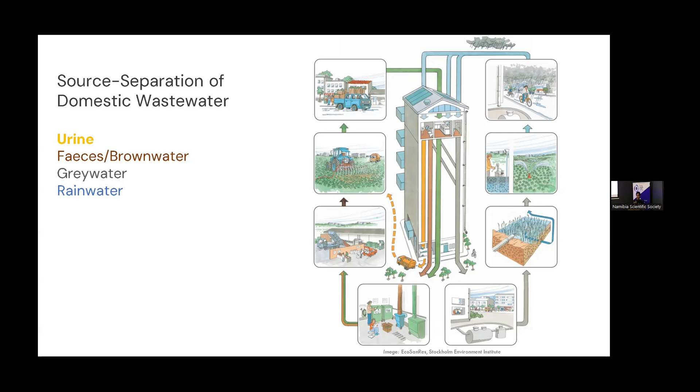personally, I got really interested in urine chemistry because urine is a very interesting matrix in its own, because in our household, only 1% of the total volume of wastewater that comes out is urine. But that 1% contains 80% of the nitrogen and 50% of the phosphorus and potassium. So these are the same nutrients that our wastewater treatment plants use energy and chemicals to remove, not recycle.

So even though urine is such a small fraction, it's not as easy to recycle. You can collect urine and use it as a liquid fertilizer, but you can't scale that approach at a city scale, right? Because urine is 95% water. So even though it's such a small fraction, it's mostly water. And the reality today is majority of us live in cities, in urban areas. So how do we get urine, which is mostly water, from the city center to rural cropland where the majority of the food is grown today?

And depending on where we live in the world today, these distances between urban and rural cropland can be a few kilometers, for example, in Uppsala, where I live, to a few hundred kilometers in New York and Boston. And that's the reason why we don't recycle or transport liquid urine from the city to rural cropland to be used as a fertilizer.

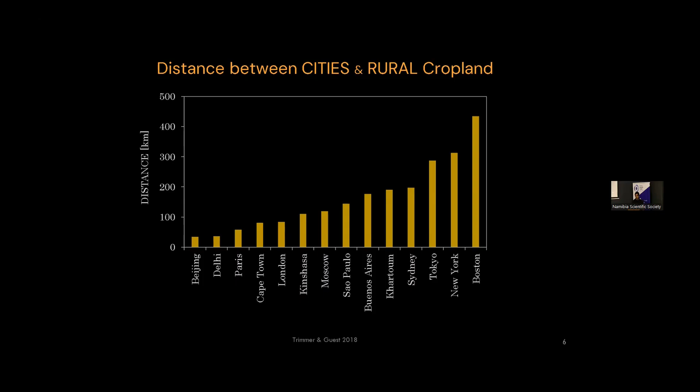So at SLU, at our university, we started thinking, what can we do with urine at the source, where it is produced? What can we do with urine at the house? Is there a way we can somehow dehydrate the urine so we get rid of the water, so that instead of collecting and recycling 500 kilograms of liquid urine per person per year, we recycle only 20 kilograms of dried fertilizer? So on paper, it seems simple, right? Let's separate the water, let's collect the nutrients, let's use it as a fertilizer.

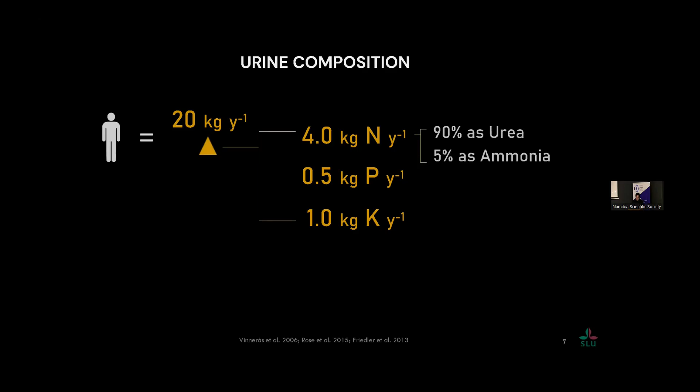So we started investigating that and realized that when we excrete urine, the pH of urine is around neutral, between 6 and 7 for an average person. But once urine goes through our toilets and our sewer pipes, a few reactions happen that convert urea, which is the main nitrogen compound in urine, into ammonia. This reaction produces ammonia, which is a base, so it also has a side effect of changing the pH of urine from 6 to 7 to around 9.

And that's important because at that pH, the ammonia that is produced by the reaction is volatile. It's a gas. So if you've been to a bathroom that hasn't been cleaned often, the smell that you get from urine, the majority is essentially ammonia. And that's because it's a gas.

So urease, this enzyme, is present everywhere in the environment. It's ubiquitous. It's in our skin bacteria, because the bacteria produce urease. It's in our saliva, in our feces. It's in our soils. So when a farmer is applying urea as a chemical fertilizer, this enzyme is actually very beneficial because it converts urea into ammonia, which is a form of nitrogen that plants can take up for nutrition.

But in a source-separated sanitation system where we want to recycle urine, this enzyme is a bit of a nuisance because it takes urea, which is a non-volatile compound and the most widely used fertilizer in the world, and converts it into a volatile form, ammonia. So if you try to dehydrate urine that has already been hydrolyzed, where the majority of the nitrogen is now ammonia, you lose the ammonia as a gas.

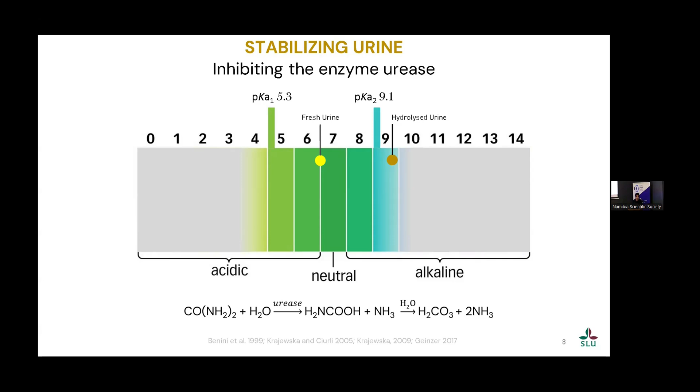So we then started looking at what chemicals or additives we can add to the urine in order to shift the pH of the urine and make it stable. And we say stabilizing urine because we are stabilizing the urea in the urine so it does not convert to ammonia. And after several years of experimentation, research, trials, we developed something which we call NutriFiks.

So NutriFiks is a blend of organic acids, for example, citric acid from lemons. It's a blend that has been carefully selected in order to optimize the dosage of the chemical we add, but also to shift the urine pH to below 3, and it's also optimized for cost. So over the last few years, we've optimized it to an extent that now we only have to add a few grams of NutriFiks to every liter of urine so that it stabilizes the urine.

And for a person to have enough NutriFiks to stabilize the urine for a whole year, we estimate the cost to be less than 100 Namibian dollars. So meaning it's affordable to a wide segment of society.

So that's more or less the chemistry part of this talk, where the only thing I'd like everyone to remember is you have freshly excreted urine before it goes into the toilet or into the sewer pipes. If we acidify it, we stop biological reactions that we don't want to occur so that we can keep the nutrients in a stable form so that we can then evaporate it. So if you dehydrate urine that has been pre-stabilized with NutriFiks, you recover more than 99% of all the nutrients that are excreted in the urine.

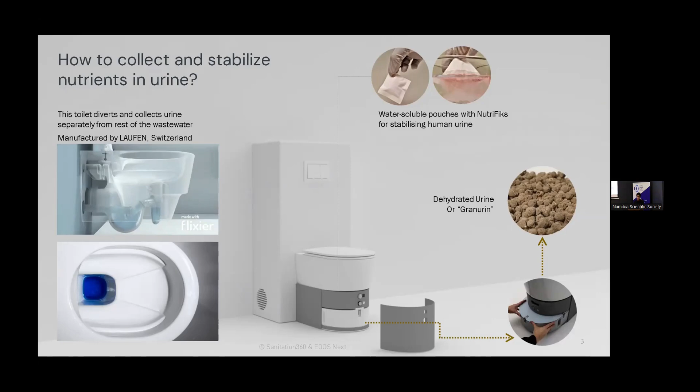So the end product out of all of this process is that dried product, a dried powder, which we call GranUrin. GranUrin being granulated urine. So because we remove 95% of the water, all we are left with is a dried powder that has up to 20% nitrogen, 2% phosphorus, 5% potassium, carbon because we dose it with organic acids, sulfur, and everything we eat is essentially excreted. All the water-soluble waste of our body is excreted via urine. So all the micronutrients that we consume in food are also in this dried product. So compared to chemical fertilizers that we buy at Agra or wherever, dried urine is a more complete fertilizer because it not just provides macronutrients, it also provides micronutrients.

And it is possible for us to remove just 50% of the water or 90% of the water in urine and make concentrated liquid fertilizer that we can dose or use as a fertilizer. But we fully dehydrate urine and granulate it. So the powder that you get from the toilet, we granulate it like urea is granulated into prills. And that's because if you own a big farm with 100 hectares of land, you wouldn't be applying a liquid fertilizer. A liquid fertilizer is great when you're fertilizing your flower pots, but if you want to shift chemical fertilizer use at industrial scale, we need an industrial fertilizer that works with existing machinery.

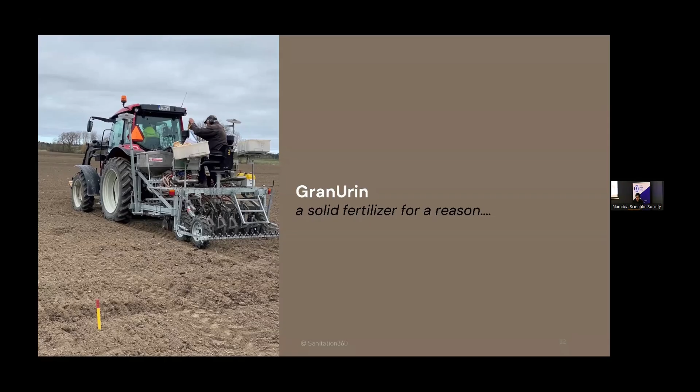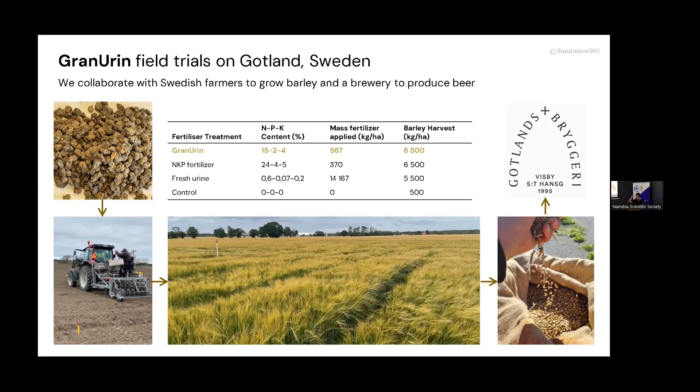The barley that is then produced is malted by a local brewery called Gotlands Bryggeri, and they also then produce the circular beer, which is then also sold commercially in Sweden already as a consumer product that can be bought. So we're showing that it's not just research, we can do this in practice. And if you have all the actors in the service chain, you can actually close nutrient loops in society. So, but just because we have a consumer product doesn't mean that people are going to accept it, right? So it's a question we get asked quite a lot.

So we did a study ourselves. We looked at more than 5,000 participants on an online survey across 15 different countries to gauge what would be their potential willingness to buy and eat food that has now been grown with urine. It's a strange question to ask because when we're buying food at a grocery store, we don't really ask anyone whether we applied pig manure or cow digestate or whatever. But it's a question that we get asked quite often.

So we did that study and we found that at least on average, and this is such a hypothetical concept, right? There is no commercially available dried urine that you can buy or food that has now been fertilized apart from Sweden. So even in this initial willingness, we found that at least 60% of the people are open to that idea. So much more than most people would think.

We've obviously done a bunch of experiments and studies looking at the safety of the fertilizer. We've looked at a range of bacteria, viruses, helminths, parasites, even antimicrobial resistant genes to show that the fertilizer, this urine that we produce, actually meets most of the global wastewater recycling guidelines already today. So it meets US EPA rules, it meets World Health Organization guidelines.

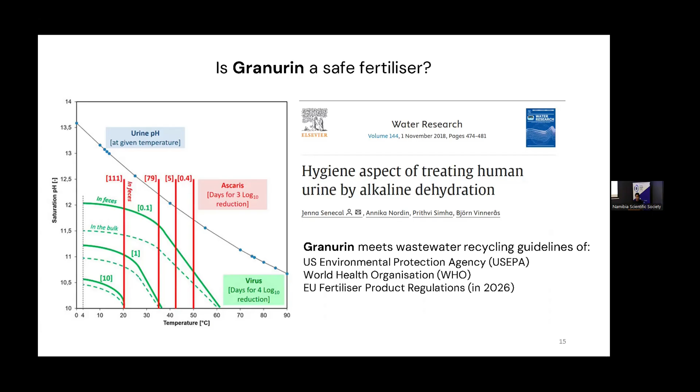Another question we get asked quite a lot is, what about micropollutants in urine? Where do they end up, right? So we did a study, again, with the same barley farmers that we collaborate with. We collected more than 20,000 liters of urine from public urinals across Sweden in order to get a representative sample of what a micropollutant contamination in reality looks like.

Because if you look up most studies on these topics, they're all laboratory-based studies where you take urine and you spike it with extra amount of micropollutants. So you don't really realize what the real dose of micropollutant contamination is. So we collected real urine from a representative sample of average Swedish urine, and we screened them for 40 different pharmaceuticals that are most commonly used in Sweden.

We did detect 7 out of these 40 pharmaceuticals in the urine, as well as the dried urine that we produce. But the concentrations of these pharmaceuticals are at nanogram per gram level, which means it's at least 100-fold lower than the pharmaceuticals that are already present in our cow manure, as well as sewage sludge, which is produced by our wastewater treatment plants. And both cow manure and sewage sludge are already used globally as a fertilizer.

So the conclusion from the study was yes, there are pharmaceuticals, but the concentrations are at such an extremely low level that as a consumer risk, it's quite low, because we tracked the fate of these 7 pharmaceuticals along the full food chain to show that we couldn't detect it in the soil, in any parts of the barley, in the kernel, or the malted barley and the beer that is now on the market. And that's also quality assurance that the brewery needed in order to put the beer on the market.

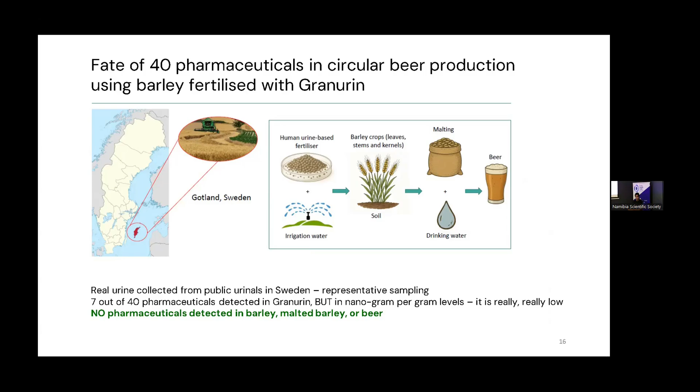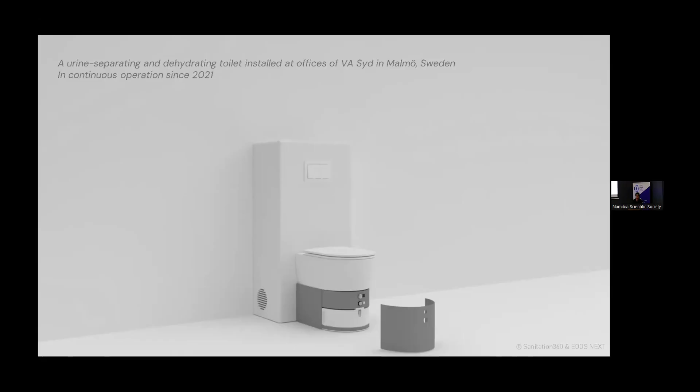But the reality is that in Sweden, more than 90% of the households are already sewered. So for us, it's a struggle to figure out where can we collect enough quantities of urine from. So one of the first things we looked at was existing buildings that were built in the 1960s and 70s that are now due for renovation.

So people don't switch toilets that often, so you have to wait until you're at that cycle. So we built a toilet, which we installed at the offices of a wastewater treatment plant in Malmo, where all we did was we took out the old toilet, put in this new Laufen urine separating toilet that separates urine with the teapot effect. And we developed a cartridge that can go below this existing toilet so that it doesn't use extra space in the bathroom. And in that cartridge, we load Nutrifix pouches.

So the cycle works like this. On the first day, we load the cartridge with enough Nutrifix to last for a whole month. So every day urine keeps coming in, keeps getting stabilized, and using a fan and existing ventilation, it keeps getting dried. And the whole system is digitized, so we know what level of urine we have in the containers. In case there is a party, there is an overflow function.

So at the end of that month, you get a warning saying in a week, it's time to harvest the dried urine. And at the end of that week, you get a red warning, meaning you can still use the toilet, but the urine does not get collected in the cartridge. So the end product, when we remove the cartridge, is fully dried. And to start a new cycle, you remove the cartridge and put in a new cartridge with Nutrifix.

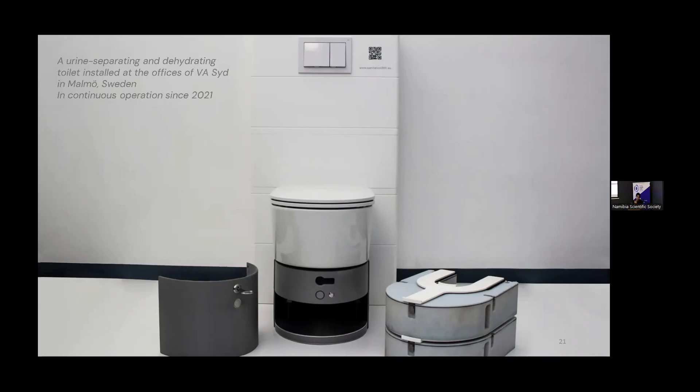We've also built a mobile urine concentrator, because festivals happen in remote places where thousands of people congregate, where there is no sanitation. What do we do there? So we can install urinals or urine separating toilets, very similar to what you do at a construction site. But instead of transporting the urine volume, because we don't want to transport water, we've developed this mobile concentrator that we can bring to the festival, collect the urine, and concentrate it to remove 90% of the water. So the urine is still a liquid, but now we are dealing with a tenth of the mass.

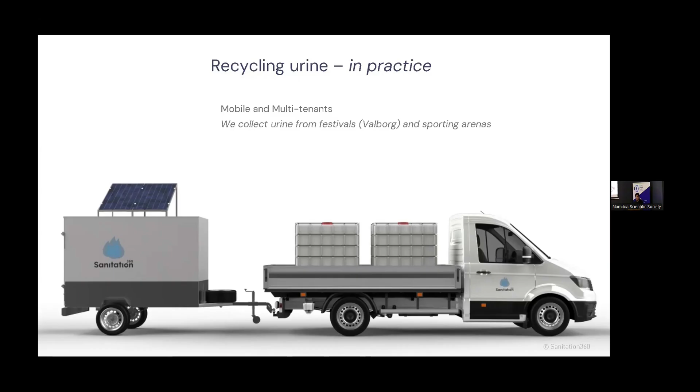So that is then pumped into the IBCs, the 1,000-liter tanks, and we bring the concentrate back to Sweden's biggest cement manufacturing plant, where the kiln releases hot air at 300 degrees just into the atmosphere. So it's waste heat that we can actually use for a bunch of things. So we asked them, can we use their waste heat? And they were like, yes, go for it.

So we installed a pipe to take that 300-degree heat, blend it with ambient air, which is at 25 degrees, in order to create a stream that is now at 100 degrees, which we can then use to evaporate urine. So we can use existing waste heat in many facilities, not just a cement plant, for example at data centers, where there's a lot of heat being produced and a lot of water being used to cool these systems down.

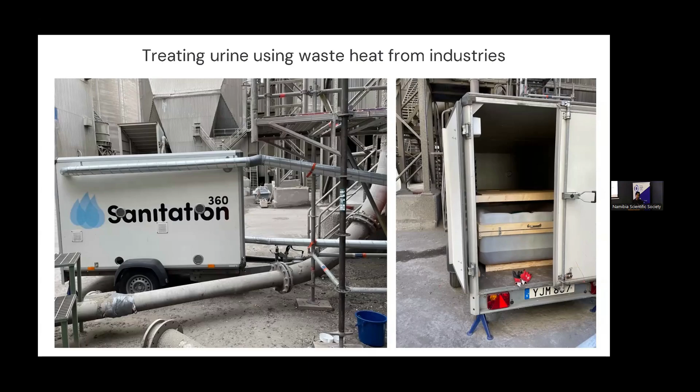Once it gets filled up, all the urine from different parts of the stadium is then vacuum pumped to one shipping container at the end of the stadium, where we then concentrate it and produce a fertilizer. So we have a whole week to dry the urine because we are only hosting football matches every weekend.

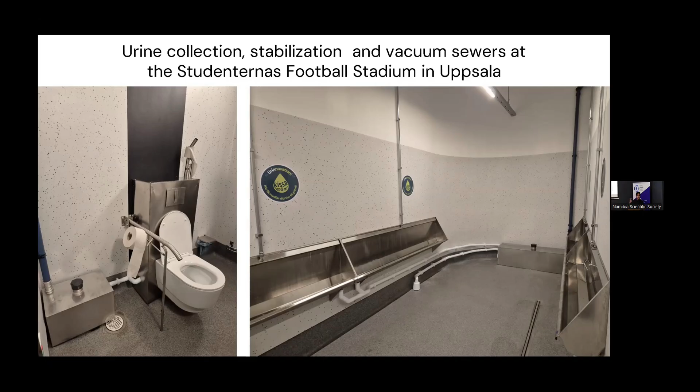So overall, the process is you add the stabilizer, the Nutrifix, in order to make sure nutrients stay in the urine. We dry that urine, either fully or pre-concentrated to remove 90% of the water, so that concentrates from different buildings, the football stadium, public urinals, can all come to one production facility where it's now fully dried and granulated.

And thereby you also assure product quality, because each of us eats different food. So we produce different nutrients in our urine. But if you collect it from enough people, on average, you have the same composition.

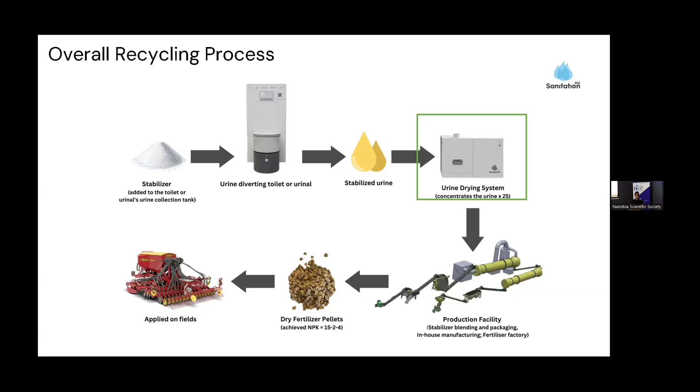But overall, the bigger picture is how much impact can we have by recycling urine globally? So the answer is a third of the chemical fertilizer that we use today can simply be swapped with urine recycling. So urine can substitute 30 to 40% of the global nitrogen and phosphorus fertilizers that are produced synthetically or industrially.

And depending on where we live in the world, this replacement potential can be 30%, for example, in Namibia, but it can be more than 100%, for example, in Kenya, in Uganda, and also in India, in several parts where you have a lot of subsistence farming. So the access to chemical fertilizers is low and chemical fertilizers are expensive. So farmers don't use chemical fertilizers.

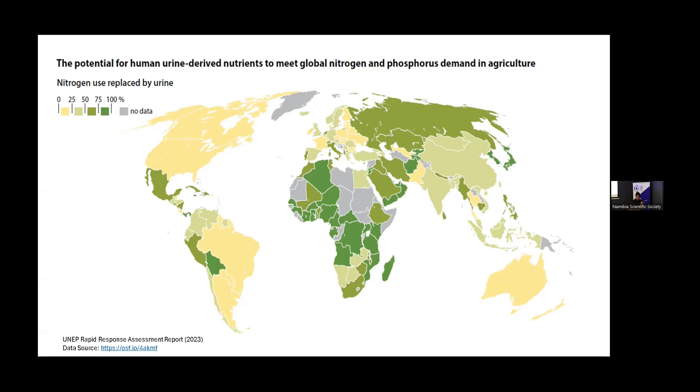In that case, dried urine or any urine-based fertilizer can actually improve crop productivity using the same land. So in many countries, you can actually double or triple the food production just by recycling urine within the same spatial footprint.

So before I hand it over to Herb, I have one thing I would love everyone to remember: the urine that each person produces every day has enough nutrients to fertilize enough wheat to have a loaf of bread. So next time you go to the bathroom, every time you're peeing, you're essentially peeing a loaf of bread away. Yeah, thank you.

Thanks, Prithvi. Prithvi gave you all the science, and as an architect, I'm more interested in application, and that's essentially where our collaboration started. So, just to put it into context: it's great to do this in Sweden, but what about the rest of the world? And that's where I'm a huge advocate for the global south.

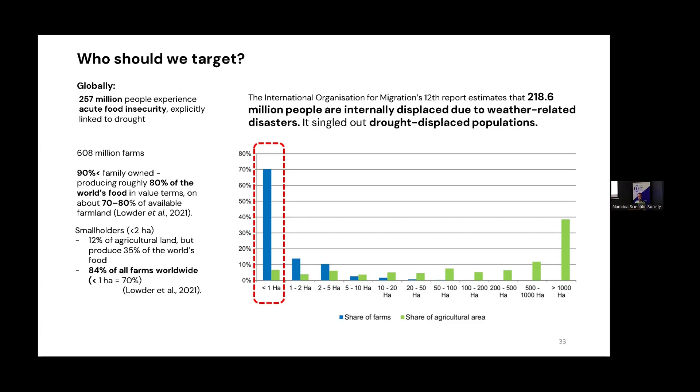But to really have an impact, we really need to think about decentralized urine collection and drying. So that's where we started. Now bringing it back home to Namibia, if we look at our own catchment zone here in Windhoek, this is what Swakop looks like. This is data from NamWater, and they track this extensively.

And most of you will be aware that actually we're in a closed loop. So if you look at the bottom right-hand corner, you'll see that we have 3 dams. Goreangab's already unusable. Swakoppoort's our main holding dam, and everything that flows down our rivers ends up there. And then we pump it to Von Bach and to Windhoek. So this is an existential crisis for our own water security.

And a large portion of this is actually the nutrient that ends up in the water and goes to Swakoppoort in the long run. So it's not just about food security. It's not just about people's housing. It's also about our own water security as we sit here. And just to drive it home, it costs 10 times more money to remove nitrogen from water than it costs to produce that same nitrogen in the fertilizer. So we really need to keep it out of our water, right? And that's where all of this came from.

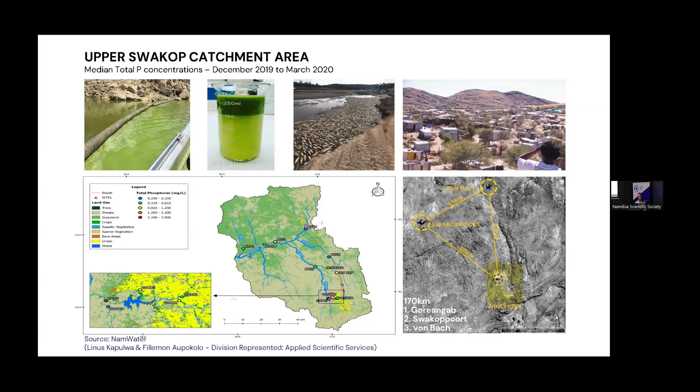So we conceptualized this idea and we said, okay, what do we need to do? It needs to be something that's extremely simple, extremely affordable, and has no moving parts, doesn't rely on electricity. So that's this box that you see in front of you here called the AirCloset. So instead of a water closet, it's an AirCloset. And basically, as an architect, I just drew up a quick CAD drawing, and then we went about doing the technical investigation at Gobabeb. So how we did it is you'll see there's a tray in here.

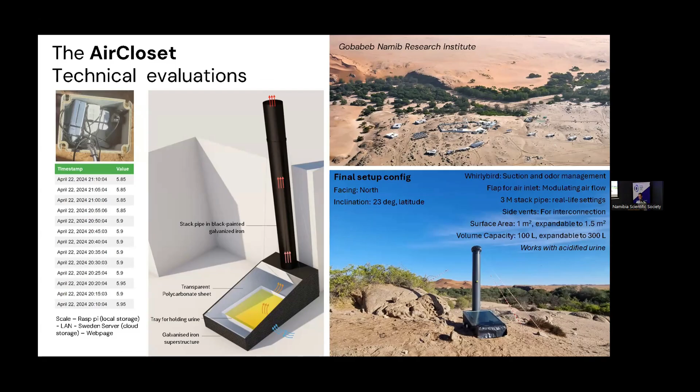So here you can see that initially we started off with a really big vent and a whirlybird on top, because we thought that ventilation is going to be important. But we soon found out that actually that ventilation rate was way too fast and we were losing all the heat. So we constrained the vent pipe. You can also see on the sides, we had vent pipes that we set up such that we could allow for more ventilation or less ventilation and test that, as well as in the front. And then on the right-hand side, you can see the product when it's almost dry, and then when we take out the plastic sheet when it's fully dried.

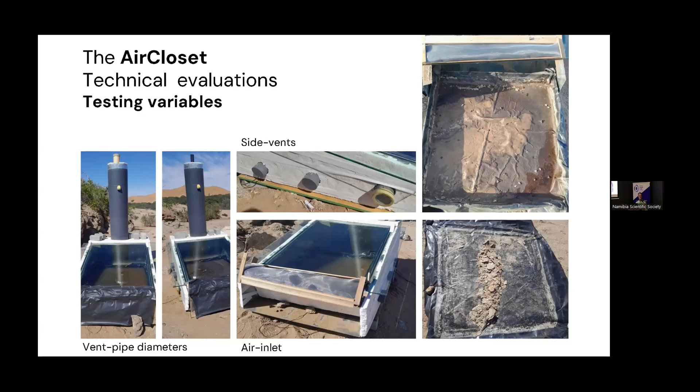We then continued iterating a little bit more. Also, I might add that we found out that insulation is really important. So we then iterated a little bit more. Prithvi was already involved in a project in Ethiopia. And based on what we had been doing together, he suggested that I should join the project. And very soon we asked one of the PhD students to continue iterating.

So this is a multi-tray system that was tested in Ethiopia. We find that it's not the most ideal because it's a little clunky to get things in and out, etc. So it's better to kind of stick to simple stuff. And that was sort of the technical investigation. Then now we're at the phase where we've done a bunch of interviews.

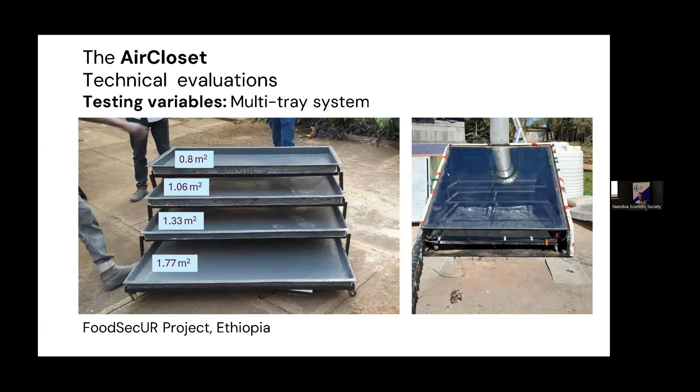We've surveyed 150 households, and now we're entering sort of dialogues. So this was at the National Urban Dialogue 2 weeks ago, which was within the Ministry of Urban and Rural Development, hosted by GIZ, where we displayed it and we discussed how it works with people.

We also took the unit to a shebeen in Katutura and asked someone, can you replicate this? Because that was really important to us, that it wasn't something that was technically too difficult for anyone to replicate, and that it would be accessible to people in informal settlements.

So here you can see the process from just folded sheets, adding the sides, doing the frame at the top, adding a mesh, painting it, etc. And here you can see the proud...

Sorry, Vibke, I'll go back for you to take a picture.

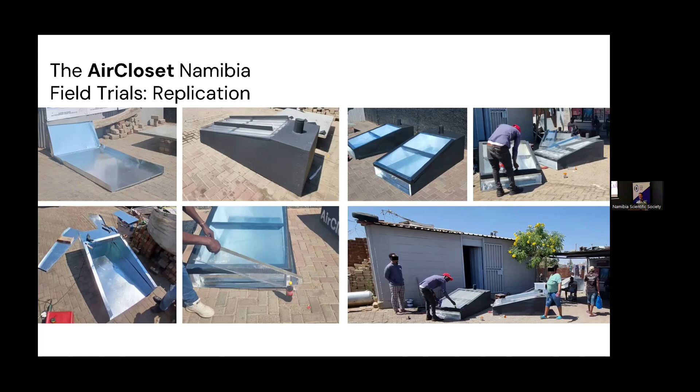Here you can see the proud contractor who had been enlisting other people along the way. He was very adamant we should take many pictures of him, so he was posed.

Then we went about identifying sites where we could install them, because we'd done all the groundwork, interviews, surveys, etc. But now we need to really see how it will work in the real world. So that's where we are at the moment. So we identified 10 sites, and today I will show you 4 sites.

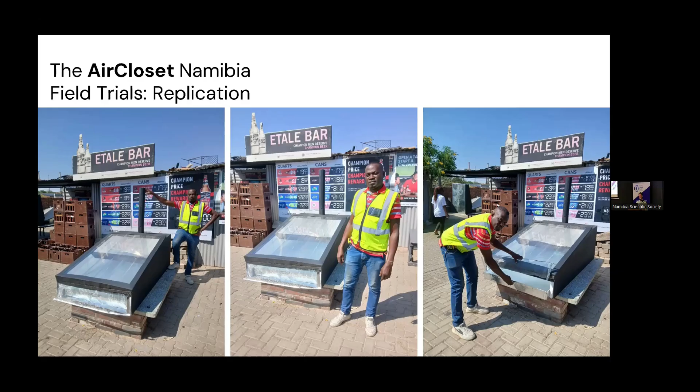This is starting with a small household scale sort of level, and then moving up to a person with a garden, then a community garden, and then a much larger scale one. So starting off in Pitananyemba, this is the neighborhood that I showed you earlier where that riverbed was so polluted.

And we first scouted for where could we find urine. So these are all makeshift urinals at various shebeens, et cetera. So we were looking at how could we potentially collect urine in these contexts. We also looked for other opportunities.

And then we did the first sort of installation. So here you can see us. We put down the first evaporator, and we were discussing with people how to go about it. And this is really just at a household scale.

Now, bear in mind, in this context, people often don't leave their house in the evening for safety reasons, and they collect their excrement in buckets. Now, that's not the ideal. That's not how we would want to continue in the long run. But for the time being, while we're testing, we're asking them, instead of throwing it in the river, please just throw it in a container, and then when the container is full, decant it into the evaporator.

Moving on, we found a wonderful site in Rehoboth, which was much easier than Pitananyemba because it's nice and flat. And it's not rocky, so it's easy to put down the evaporator. It's fenced off, etc. So this is our second site.

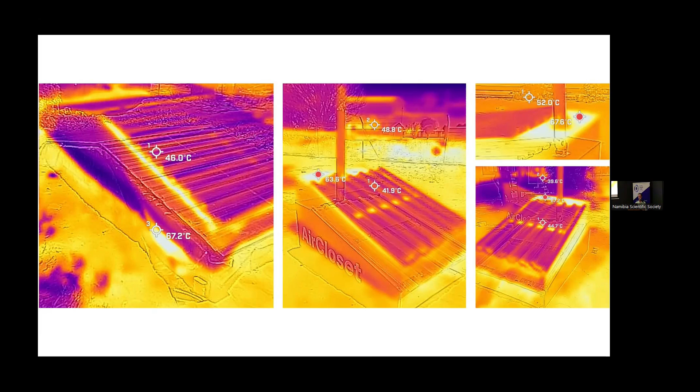So we hope that we can essentially evaporate 150 liters a day, which is about 100 people's daily urine. So that's quite a bit. And looking at thermal imaging, comparing the AirCloset on the right-hand side to the brick units on the left-hand side, you can see that the temperatures are similar, so we are fairly confident that we will get similar performance.